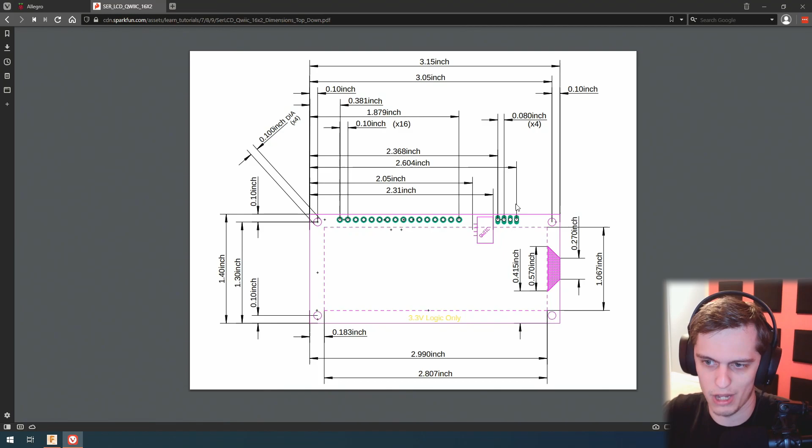And then from there, the only other two things we're really going to need is this, the schematic for the LCD, and this is the schematic for a Raspberry Pi 4. So just for reference for you guys, this is the board that we're going to be using. So it's a Raspberry Pi 4. I cut the USB 2.0 off because we don't need it, and I've got some alternative power wiring down there. This just allows it to supply more voltage through, or more amperage through the USB.

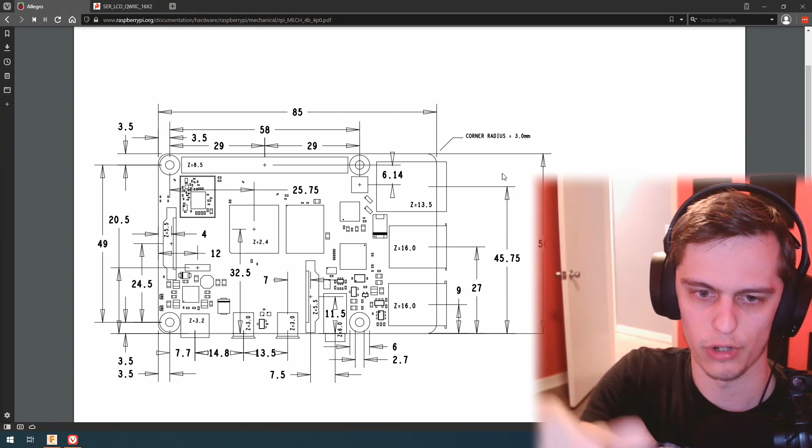And we're going to need to basically build a case that fits through those 4 mounting holes and mounts this power distribution circuit on the side and hopefully the LCD on the top.

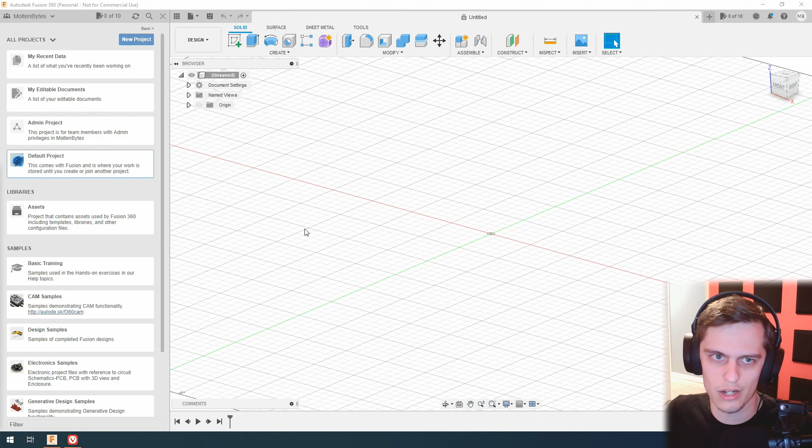So that's the goal. I don't know how much we're going to get through in this video. I'm probably going to do just the Raspberry Pi in this video, and then we'll figure out the other 2 mounts in a later video. But yeah, again, this is kind of just exploring. It's partly for me to explore the space of how a YouTube video like this even going to work, how I could potentially stream this in the future, as well as hopefully whetting your guys' appetite to see more things like this. So yeah, let's get started.

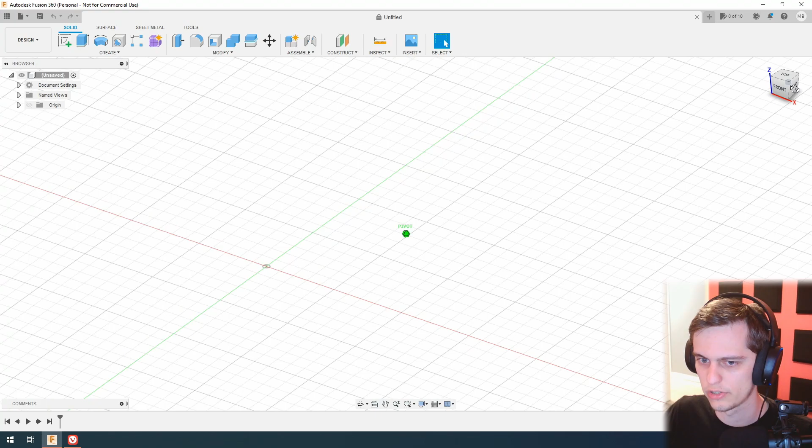Big thing to note, I am going to lay this out in such a way that the x-axis and y-axis kind of match the image that we were seeing online. So I'm going to grab the top, move that around. X-axis grows off to the right, y-axis grows up, and that's exactly how this image is laid out.

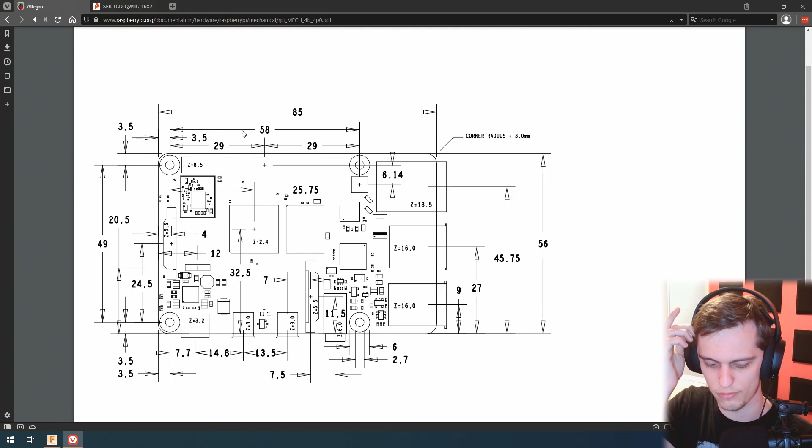So to start with, I usually like to model the actual Raspberry Pi board because that'll help us have that situational awareness of where it's actually going to live, and we can see how it's going to overlay into the case. The goal is to basically build a flat bottom structure with 4 pinch clips that the Raspberry Pi can mount into. So we're going to start by modeling this board, which is basically just a rectangle with slightly rounded corners, and we're going to see just how easy those rounded corners are.

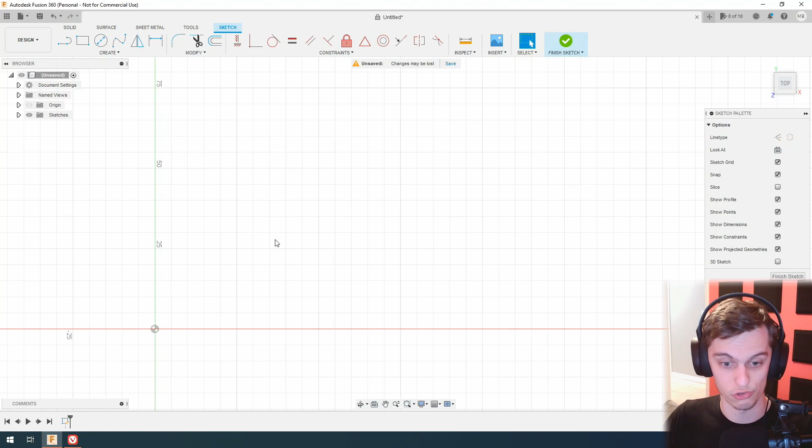In this case, we have an 85 millimeter by 56 millimeter rectangle. So we'll come over here to Fusion 360 and punch that in. We're going to do that by creating a sketch. Sketches are kind of the core piece to all of this, because you always start by drawing out the 2-dimensional shape that you're working with, and then you perform operations, or really tell the program how to take that 2-dimensional shape and make it 3D. In this case, we're going to be drawing a rectangle, rounding the corners, throwing the holes in it, and then we're going to be doing a thing called an extrusion, which basically takes a flat piece or a flat surface and just gives it some thickness. And yeah, it's pretty easy.

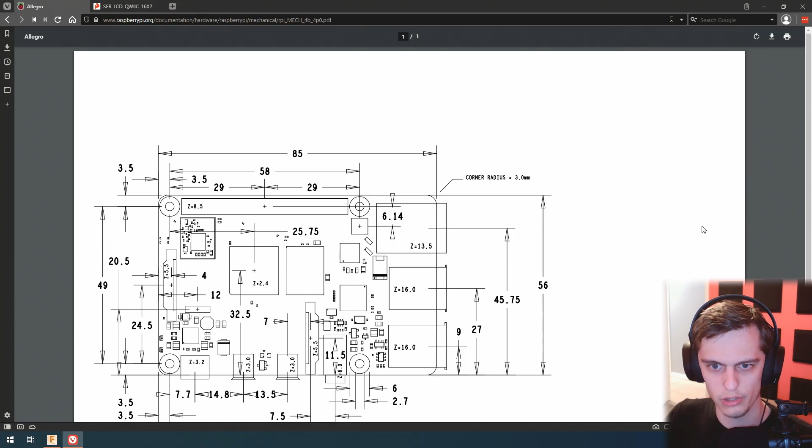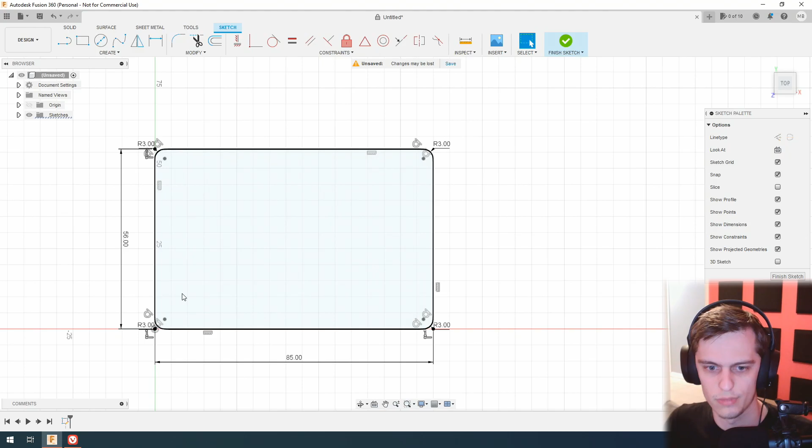So we said 85 by 56. Now we can grab the fillet tool and round those corners out. It tells us that the corner radius is 3 millimeters, which conveniently is the only spot in the entire diagram where they list millimeters. But I don't know, it's not going to be feet - that would be a big board. Inches would also be huge. So it's millimeters, I've decided. Fillet tool, and we can click on that, type in 3, and then from here it's just a matter of clicking 3, click 3, click, and 3. That wasn't that bad at all.

So now we need to lay out where the 4 holes on the board are going to go, and exactly what the dimensions of those holes are going to be. Flipping back to our diagram, this has all the information we need and a whole lot more that we don't. But the good news is we can ignore pretty much everything on the inside of the actual drawing, because we don't care about any of that. We're just focusing on these 4 holes. And if we look down here and up there, here's the one that actually labels it. This one is 2.7 millimeters in diameter, and none of the others are labeled, but just looking at them, they're going to be the same.

And now it's just a matter of spacing. If we look off on the top right here, it tells us that the distance between this mounting hole and that mounting hole is 58 millimeters, and from here to that one is going to be 49. We know they're a rectangle, so that works well. So if we can place any one of them, we can place the other 3.

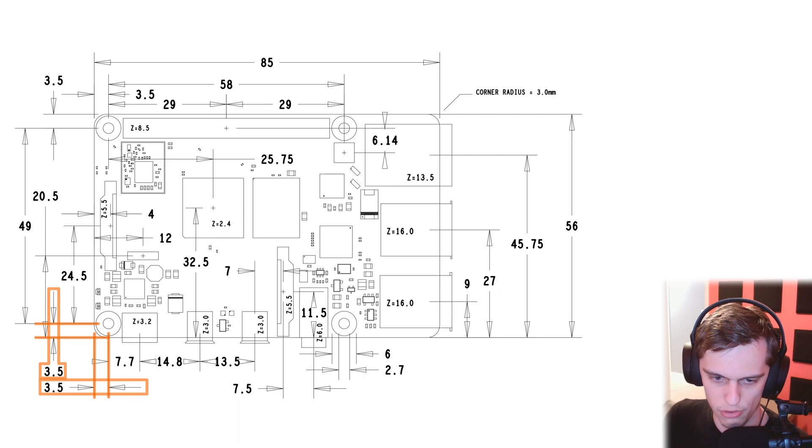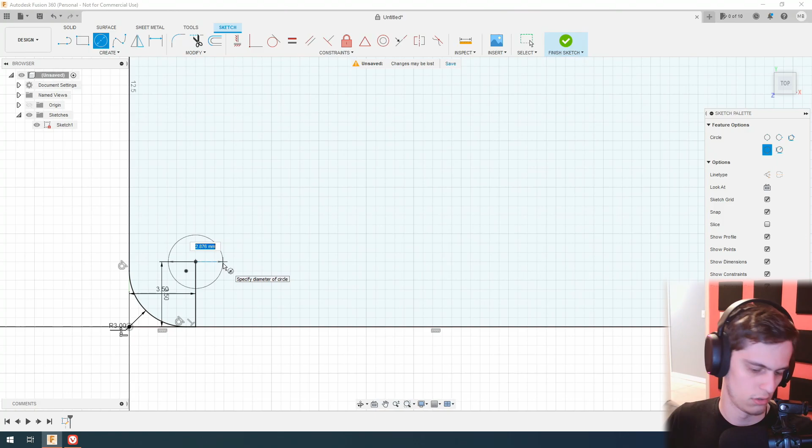Down here, this one is 3.5 millimeters offset this way. As you can see, they've got the vertical lines from that side to the center as being 3.5, and then from the base to the center is also labeled as 3.5. So 3.5 millimeters right, 3.5 millimeters up, and you've got the center of this hole, and then the other 3 can be laid out based off of it. So 3.5 millimeters that way, 3.5 millimeters up, and that's going to be the center of our 2.7 millimeter hole, which visually looks like it's about in the right place. That inner hole is what we're going for. The outer ring is the pad that you theoretically could - there's no solder pad on that, but if you look, it's the spot on the board where they actually have a cut out.

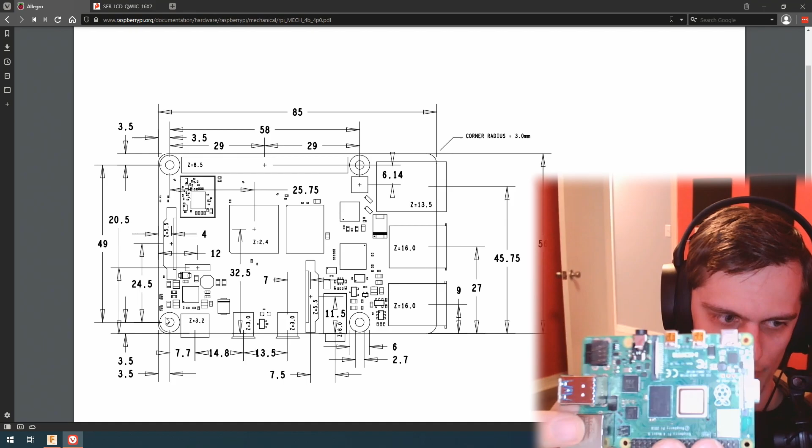I don't know, I guess they just guaranteed that there's no components there. You could put a screw head or something there.

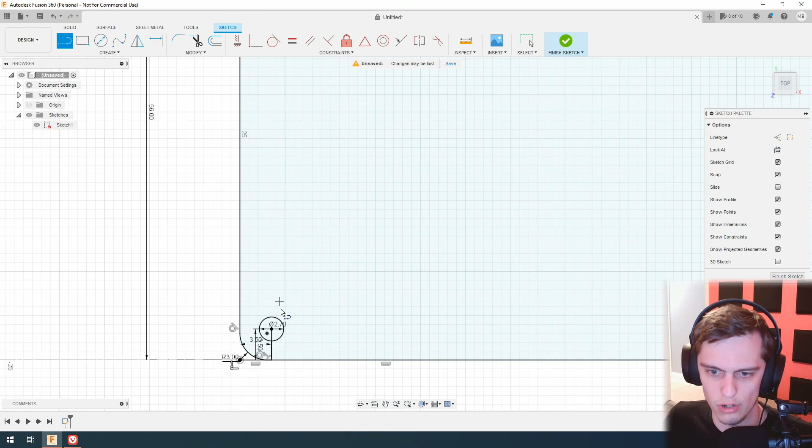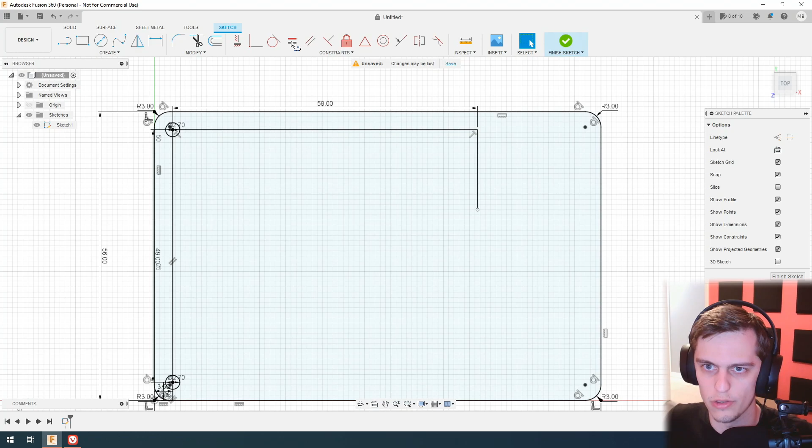So 49 millimeters up is going to be the next hole, and then 58 off to the right. The best way to do this is grab a line, grab the center, go 49 all the way up, 2.7, and then another line over that's 58. Now here's an interesting thing: we should be able to take a line and drop it down off of that, and then tell Fusion that this line needs to be the same as that line, and it'll make them the same.

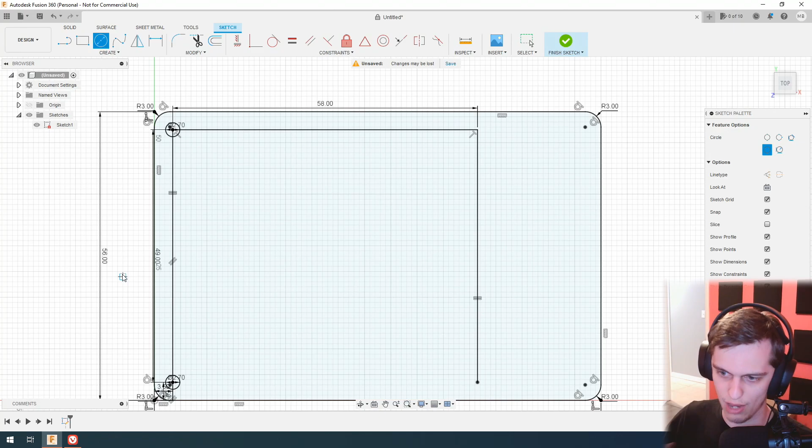The big thing is it will forever enforce that they're the same, which is convenient, because later on we can come back into this sketch and edit the dimensions if any are wrong, then play all our operations forward again. That way we can edit the length of this line and it'll forcibly make this line change, then play everything else back on top of it, which is really convenient.

So 2.7, and finish sketch. There is pretty much the footprint of our Raspberry Pi board.

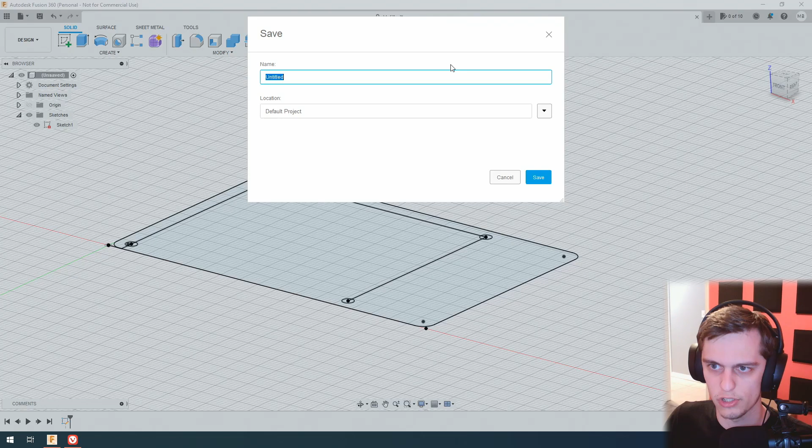Before we get too far, I'm going to save the changes, and we're going to call this the Raspberry Pi custom case. We'll save it into the default project because I don't have anything better.

Saved. Thank you for showing me my web browser, but that works. Okay, so we've got the footprint and the sketch laid out.

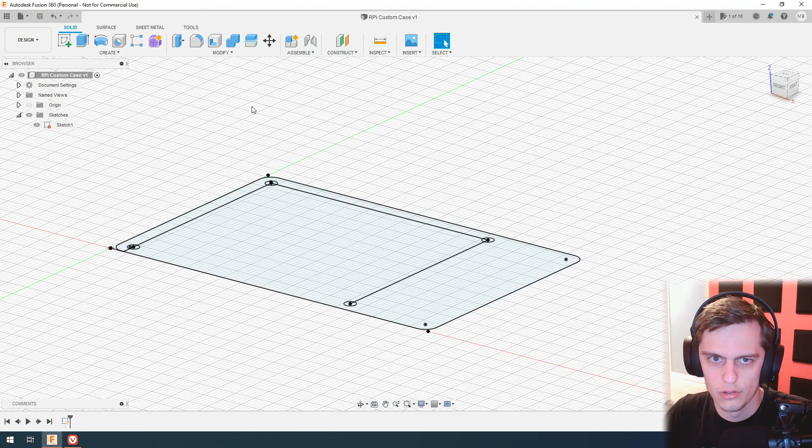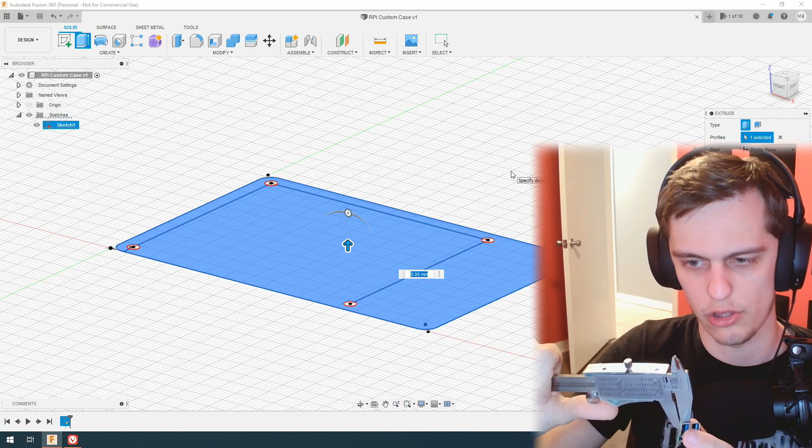From here, let's extrude the Raspberry Pi, and we need to figure out how thick we want this to be. I'm going to grab my set of digital calipers and measure the thickness of the PCB that it's sitting on. Calipers say 1.5 millimeters. I'm going to call it 2 millimeters just to give us tolerance based on the stuff we're going to be doing with it later.

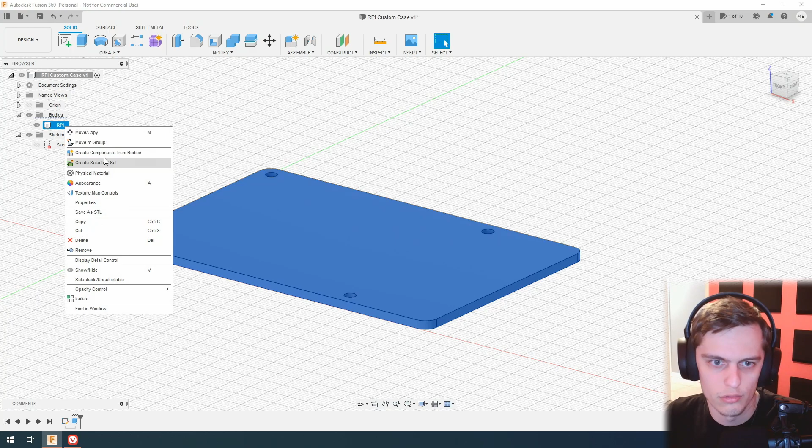There's a 2 millimeter thick PCB, and we can come over here and actually rename this to Raspberry Pi. Furthermore, to make this stand out, we can give it an appearance.

Perfect, getting there. So now I'm going to move this, and we need to figure out how far up we're going to move it, because after this we're actually going to make the footprint for the case and then throw in the actual pinch clips.

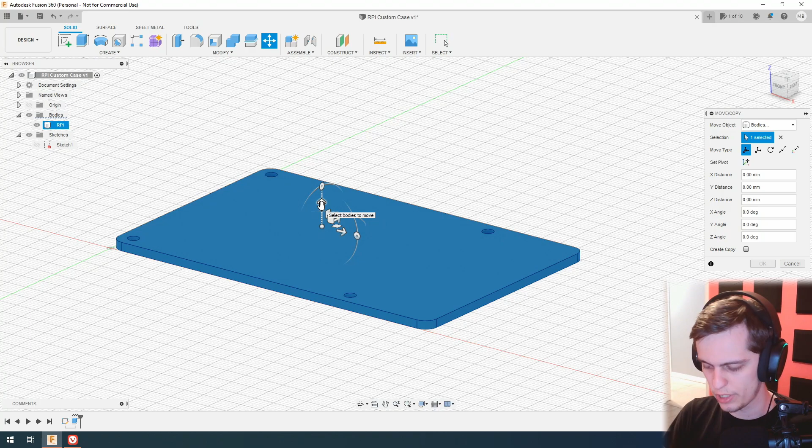Let's move it up. I think I want the actual footing of the case to be 5 millimeters, and then a 5 millimeter gap, and then the base of the board. So let's move it up 10 millimeters.

Let's get started on building the footprint for the case. I'm going to hide this, and we're going to make another sketch, again just flat. I'm going to start off with the same 85 by 56 millimeter footprint. We're not going to worry about rounding the corners. It's going to end up having to be bigger, but we can always adjust it and make it bigger later.

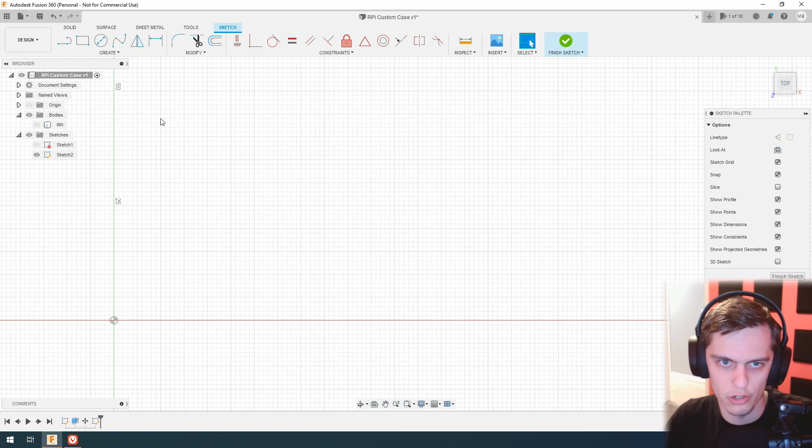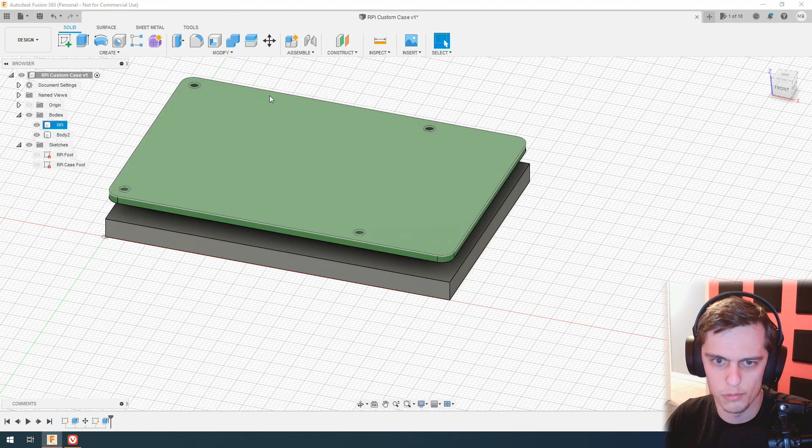That's really all we need for now, because we're going to extrude the actual pinch clips up out of this. So we'll hit finish sketch. Like we said, the case is going to be 5 millimeters thick, easy day. Then the Raspberry Pi is going to float a little bit off of that, and we just may need to make the pinch clips that actually fit into the holes.

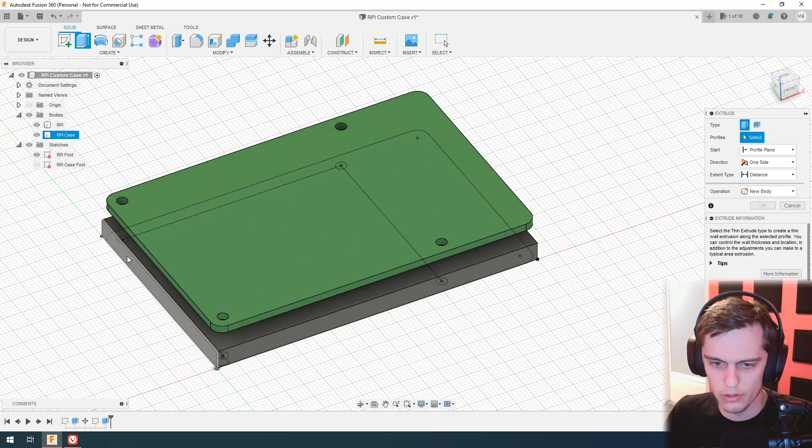The best way I know to do that is we're going to re-enable the Raspberry Pi footprint. This is going to be pretty cool, because by re-enabling the Raspberry Pi footprint, we can actually reuse these circles that literally came from the Raspberry Pi, and extrude them back up so we know the case is going to fit into it. So we can hit extrude, reusing the actual holes we drew in the sketch to make sure they line up completely with the Raspberry Pi itself.

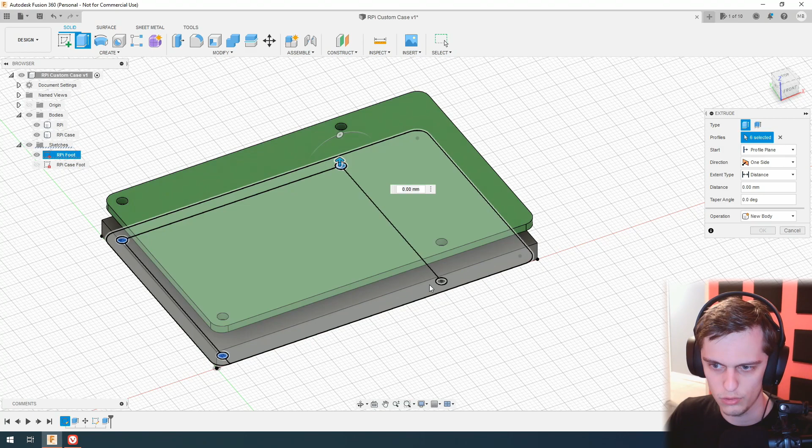If you notice, this won't let us select through the surface we've already made, but if you click and hold, it'll actually let you select that profile, and that profile, and that profile, and that one, and that guy. Now the question becomes, how far do we want to extrude them up?

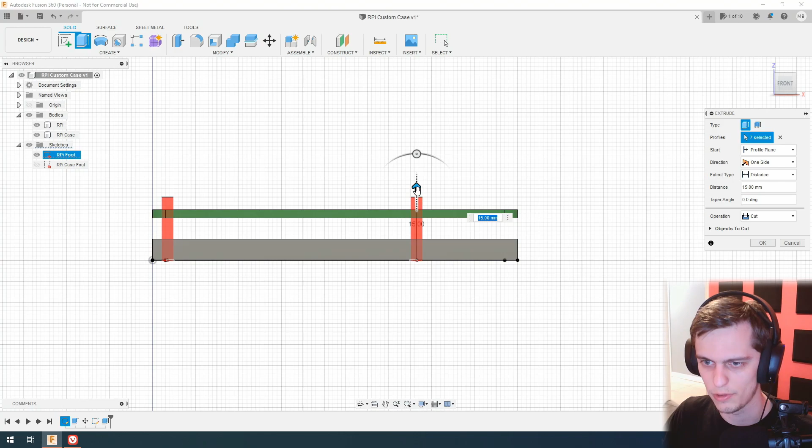12 gets us to the top of that guy. 15 is another 3 on top of that, but the plan is to have a 1 millimeter guide on the top and bottom to actually hold it in place. So if that ends at 12, that's only 2 millimeters between the top of the guide and the top of that. So I'm going to give us one more, and we can tell Fusion that we're actually looking to join the results. When we do that, we get those nice little pegs.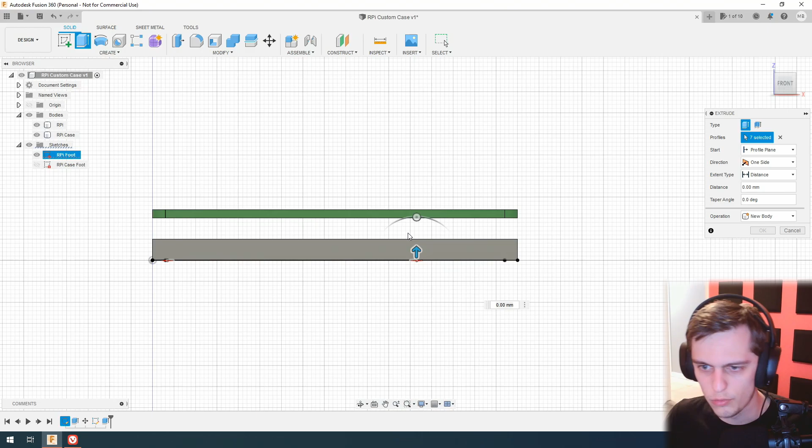Oh no, but we didn't quite want to join it like that, because we don't want to join it to the case. We do want to join it to the case, but not the Raspberry Pi itself. And then from here, once again, we have plus 1, plus 3, and then that looks right. We can hide the Raspberry Pi itself, tell Fusion that we want to do the join, and hit OK. Then re-overlay that guy back on top, hide the footprint again, and we're off to a really good start.

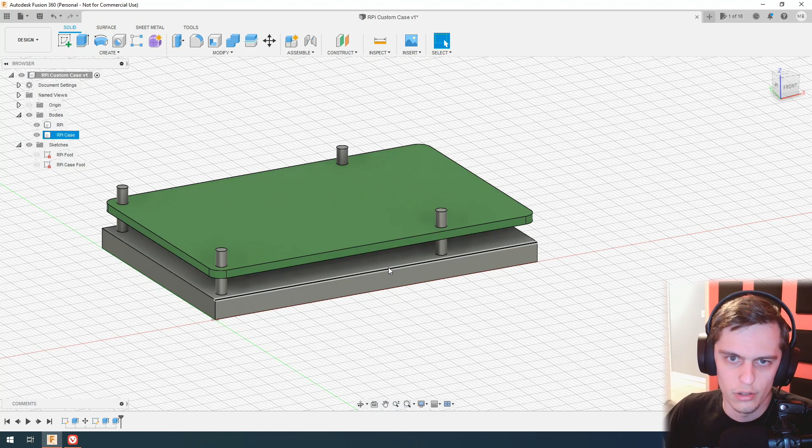So from here, really all we've got to do is model the little pinchy part to the pinch clip, which is, in case you were wondering, the technical term for that. So I think, and I'm trying to figure out the best way to do this.

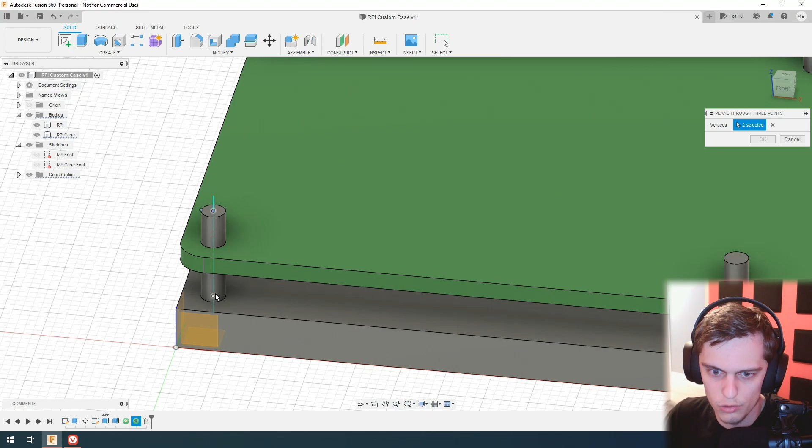I'd like to design the side profile that kind of protrudes off of the side of the cylinder, and then we can just revolve it around the cylinder. And then we just need the plane through 3 points, which is going to be 1, 2, and 3. And we're good. So there is the surface that we're going to sketch on.

So when we hit create sketch, we can now select the plane we just made and actually sketch out the profile for the pinch clip, which is pretty much just going to be this sort of thing. We're going to want it 1 millimeter thick, I know that much. And so now the question becomes, how far out do we want it to protrude? That comes down to how much space we have to work with. Ultimately, it has to make it through a 2.7 millimeter diameter pinch clip, or hole.

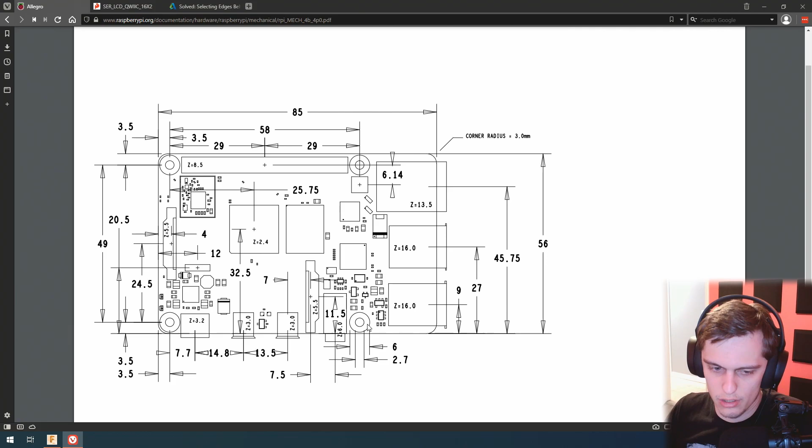Really what we're looking for, if we consider half of this guy, is that the total radius from the center out plus our dude has to make it through the middle. So however much we're going to cut out of the middle for the pinchy part is however much extra space we get to use off to the side. So it's 2.7 - we could sacrifice 1.5 millimeters out of the middle and put 3/4 of a millimeter on either side. I think that sounds pretty good.

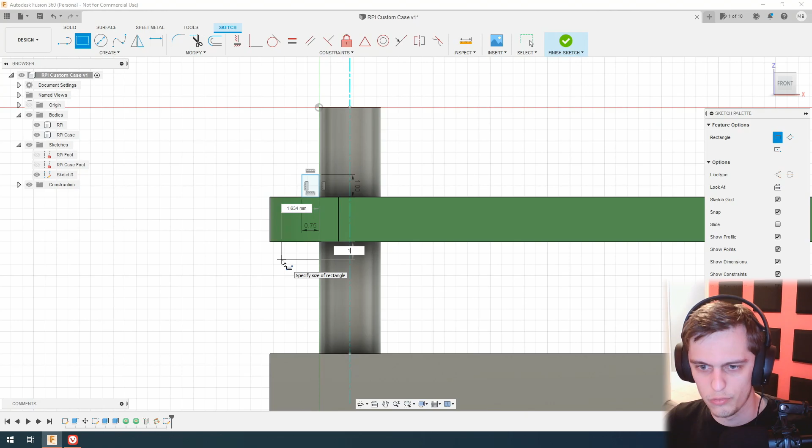So let's do that. We'll make it 1 millimeter thick for rigidity and strength and 0.75 millimeters wide, like that. And on the bottom, we'll give it the same 1 millimeter, but let's double it to 1 thick and 1.5 wide. That way we know that it'll fit through this gap and definitively not through that one. Yeah, that's pretty much going to be that profile.

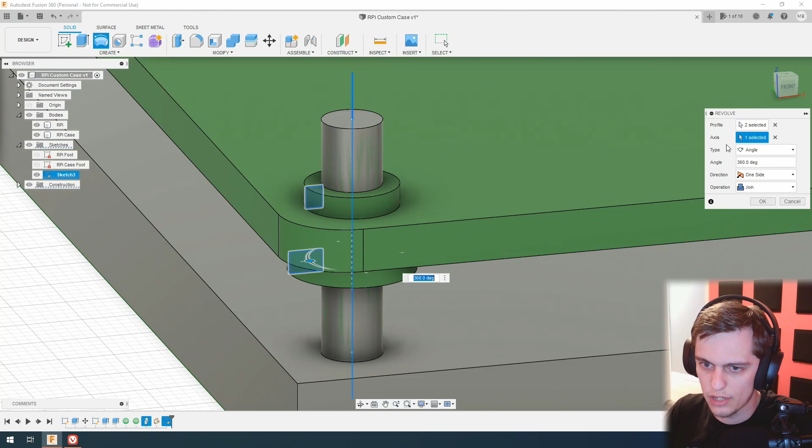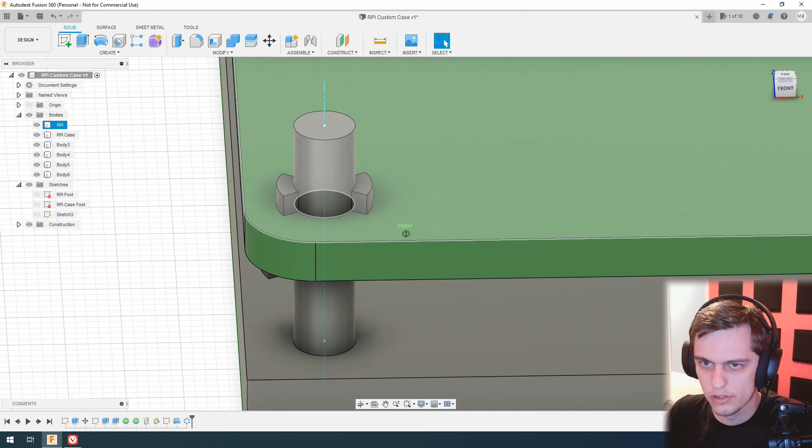So now we can revolve that dude and that guy about this axis, and I think that looks fine. So we're going to do that, and now we've got these other 2 new bodies. From here, I'm going to grab this body and that body, and we're going to create a circular pattern out of these. Then from here it's a matter of taking all of those guys and joining them. So we're going to hit the combine modifier, and we're just going to go down 1, 2, 3, 4, 5 and hit join. They're all part of the case now.

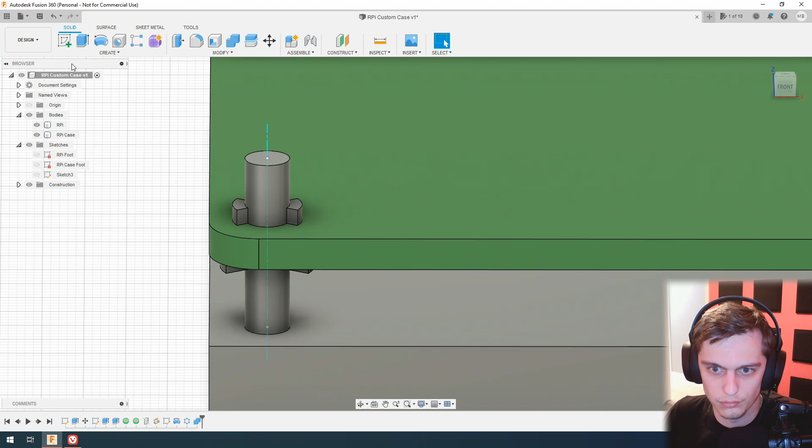So the only thing left that we really have to do is cut off of the top of this guy. I'm going to make a rectangle off of a center point and another guy. We know it's going to have to be 1.5 millimeters thick because that's what we banked on with the pinch clips.

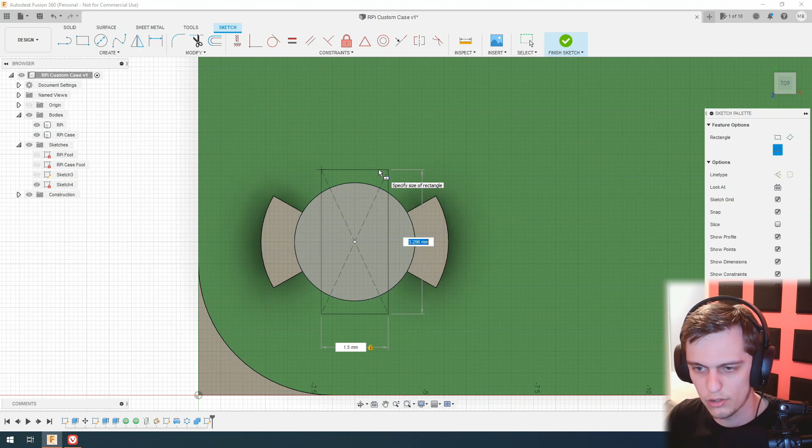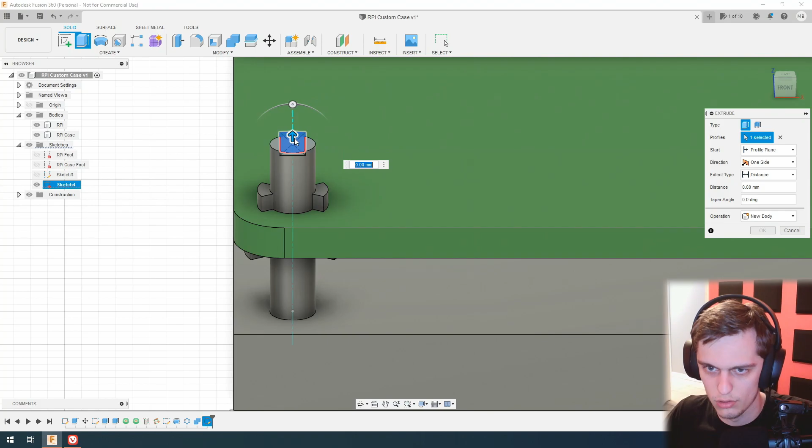That's plenty high right there. We'll just call that 3.5. We got that dude. We can finish the sketch. Now what we can do is we can tell Fusion, hey, I want to extrude that guy. I keep flipping that up, but yeah, we're going to extrude those surfaces down, which is going to cut through the pinch clip, and how deep we want to go depends on how much we need it to bend.

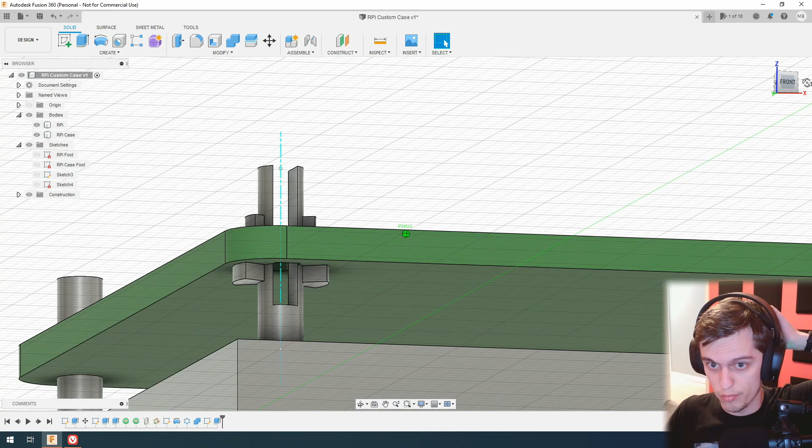And I'm just going to eyeball it and say somewhere in there looks good. So we're going to split the difference, call it -8.5, and boom, there we go. That should work relatively well.

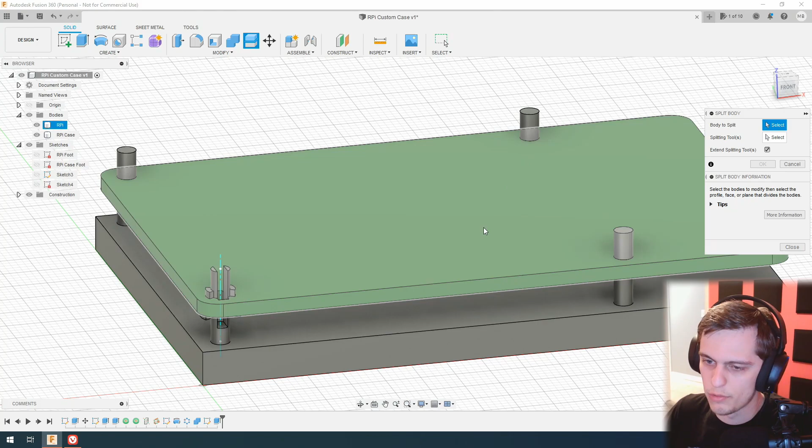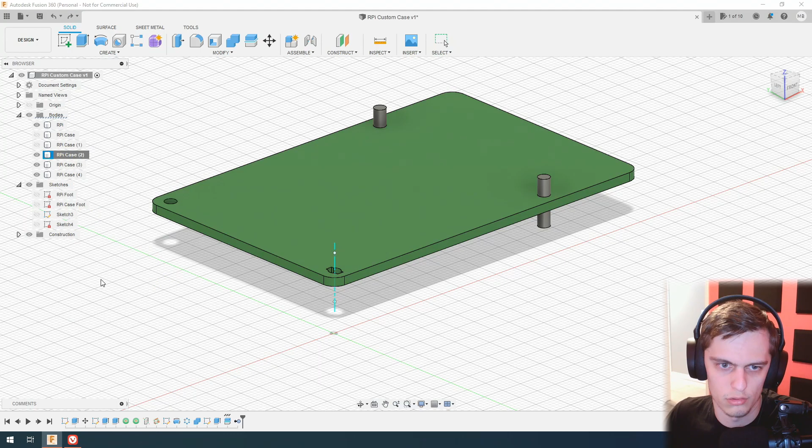So now we have to copy that pinch clip over to the other 3, which is going to be a little interesting, but we have this nice tool that lets us split the body on that plane, and go. Now we've got these other 4 pinch clips that we can go 1, 2, 3, goodbye. That's right, we technically don't want to delete it. So if I come back, can we remove? We can, okay, big note there.

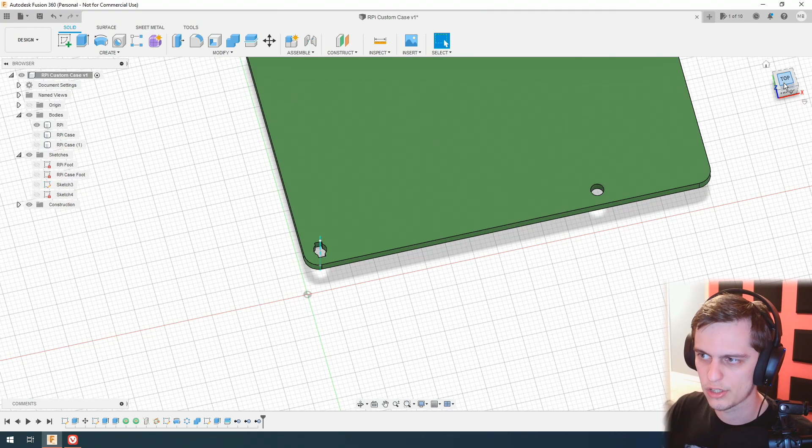When you delete something in Fusion, it's like gone forever, permanent, done. But the problem is you don't really want to do that here because it still exists in the timeline, and it's going to mess stuff up if we delete things that are already referenced in the timeline, and we don't want to do that.

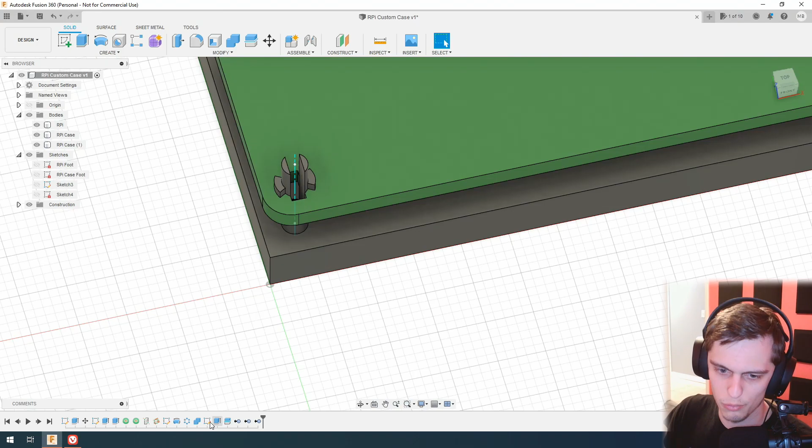So yeah, although now that I'm looking at it, we accidentally extruded, when we cut into the head of this pinch clip, through the Raspberry Pi board. So this is actually a really good example where we can roll the timeline back to this operation and edit that specific feature. We can come in here and say, hey, I don't want to extrude those, I only want to extrude the part of the rectangle that's actually inside of the clip. And if we hit OK and play everything forward, fixed.

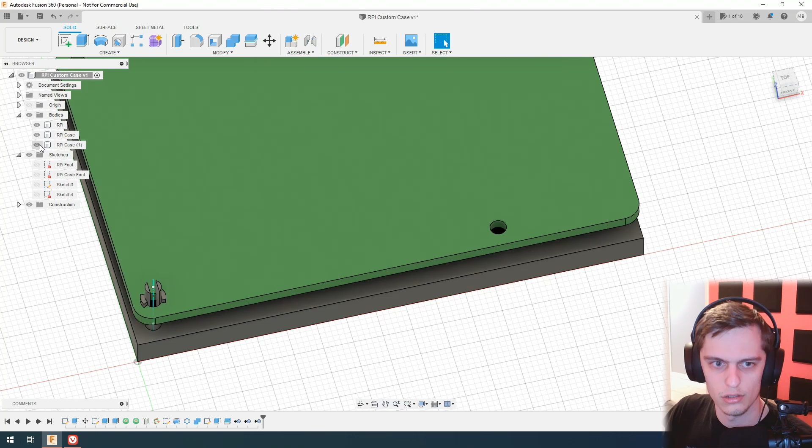That is like the #1 feature of Fusion 360 to me. No joke, that is such a game changer that one feature alone is why I use the software. On top of the fact that I just find it substantially more intuitive than any other piece of CAD software, but yeah, that's just incredible.

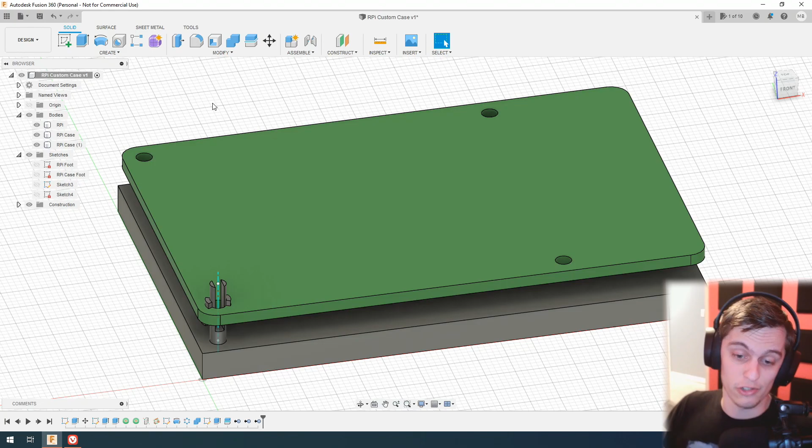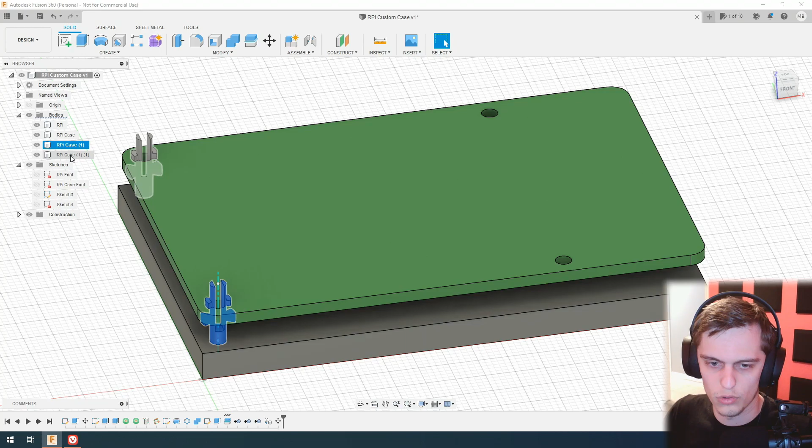So we can now take this dude, and it's as easy as move, and we can just say create a copy. We know we need to move him 49 millimeters in the Y direction. 49, easy. And then we can grab 1 and 2 and move both of these dudes. Was it 58 millimeters? 58, that way, 5, 8.

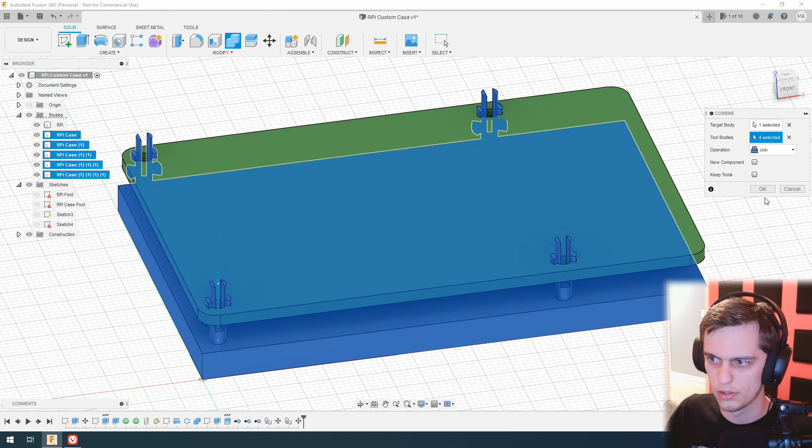Nice, and now we can make them all one big happy family again. 1, 2, 3, 4, 5. Done. Not bad, not bad at all.

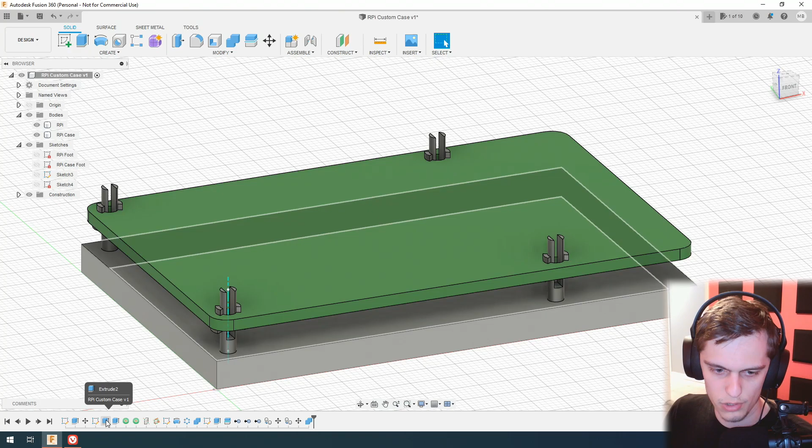Now, looking at this point, it is kind of ridiculous just how tall we made those pinch clips, and I'm kind of regretting that choice now. So we're going to come all the way back to the spot where we extruded the pinch clip, and we can extrude it 1 millimeter less. And attempt to play everything forward. But it didn't like it. So let's roll the timeline back and fix these issues as they crop up.

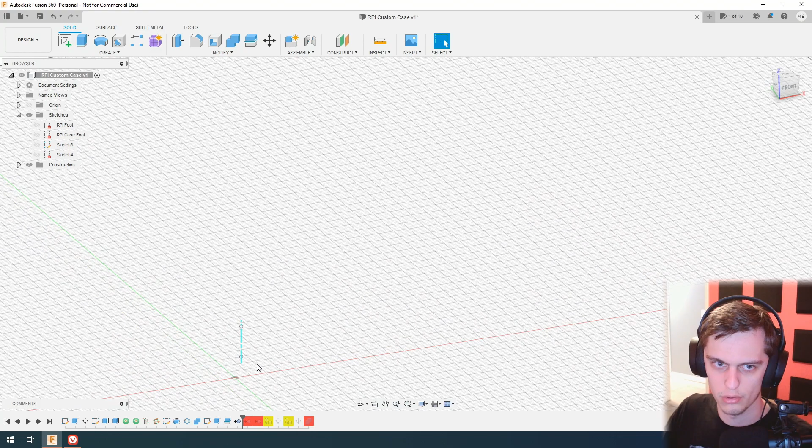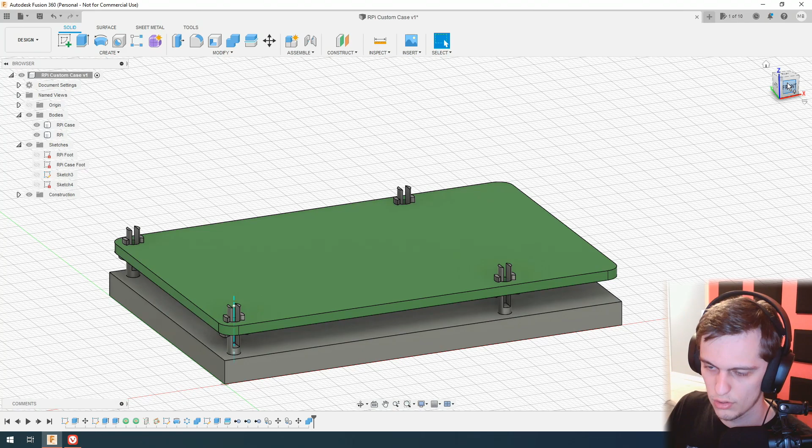Because when we extruded it this time, we didn't actually hide the Raspberry Pi itself, and so it merged them. And if we do it the right way, everything plays forward just fine. And they are slightly less ridiculous looking now. Still not completely satisfied with them though.

So let's edit this one last time. Make sure we hide that guy. Call them 14 millimeters, hit enter. Throw that back on, that looks pretty good. I am happy with that. That wasn't bad at all.

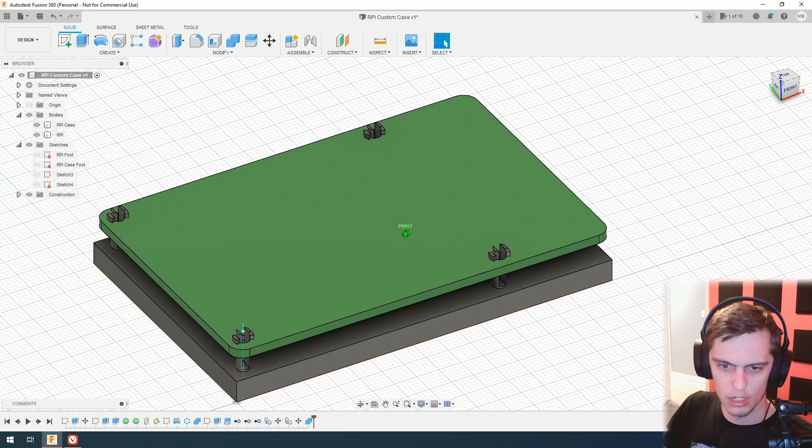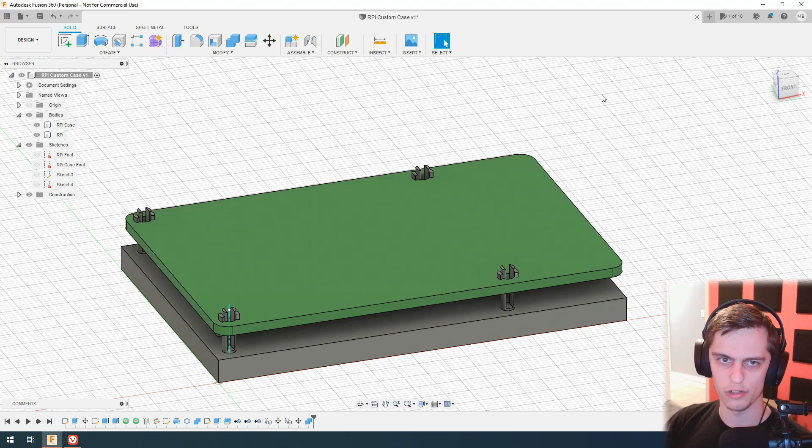I mean, again, in the end it really just comes down to intelligently and methodically laying these things out so that later on you can go back and tweak them as you need to, and just having and taking good measurements. If you do that, then it kind of just falls into place. So that's where I'm going to leave off for today.

Obviously don't want to make this the majority of my content because I really enjoy playing video games and being more artistic and creating stuff. I mean, I do a lot of this kind of day in, day out sort of thing, but on the flip side, it's nice and I do enjoy it and I'd like to share it with you guys.